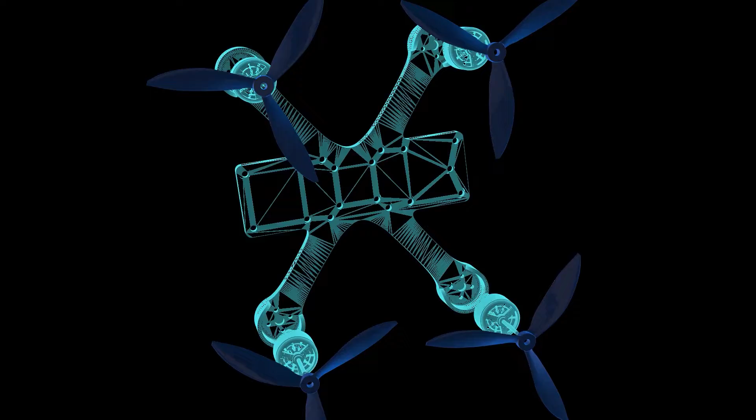In a nutshell, motors rotate your propellers to create movement. They are typically made of aluminum, steel, titanium, or even a combination of these. There are two types of motors used in virtually all drones, brushed and brushless motors. We will cover the intricacies of these in a little bit. However, they each have three main components: the shaft, the rotor, and the stator. Now, on top of the components, each type of motor works on something called electromagnetism. Let's look at that real quick before we jump into the rest.

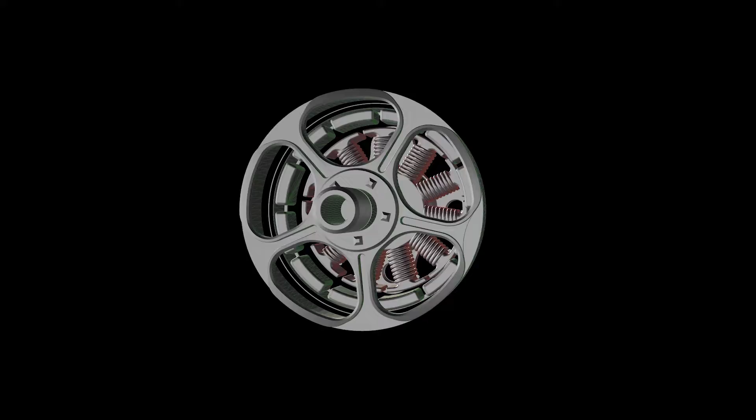Whether you are using brushed or brushless motors, the principle of electromagnetism is at the root of your motor's functionality. An electromagnet in a drone motor is made up of a metal core surrounded by copper windings, which can be activated and deactivated by passing electrical current through it. This then interacts with magnets that are positioned around the metal core. As electricity pulses through the metal core, it turns the magnets, which changes the electrical energy from your battery into kinetic energy in the form of propeller movement.

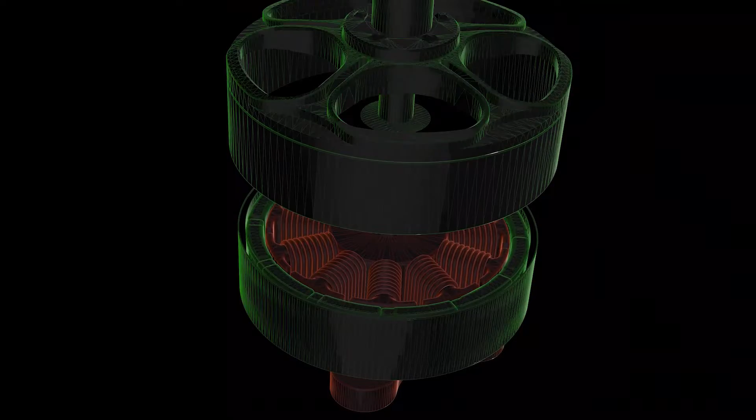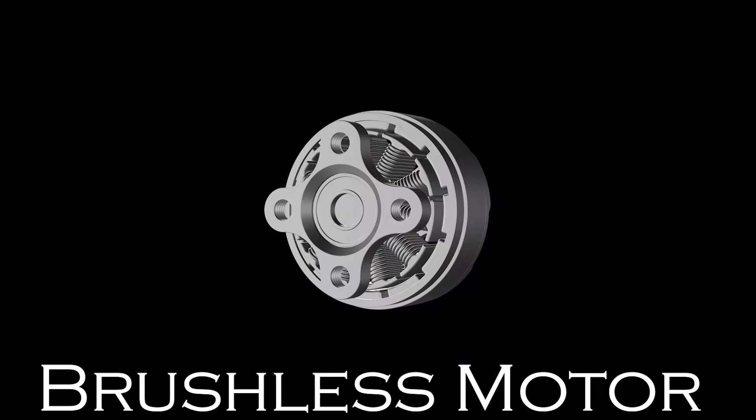Let's break it down into the various parts of the drone motor though. The shaft is at the center of the motor and is what you attach your propellers to. The rotor and stator are then attached to the shaft. The stator surrounds the shaft in coiled copper wire. As we just talked about, these wires are used to send electrical currents that interact with the last part of the motor, the rotor. The rotor is the outside part of the motor and is often referred to as the motor bell or can. On the inside of the rotor though, there are small magnets. These magnets are what interact with the electrical pulses from the stator, and as they do, they begin to spin the rotor and thus the shaft, which spins the prop.

Now, as we said, there are two main types of motors that both use electromagnetism: brushed and brushless motors. Let's look at these. Brushed motors. Brushed motors typically look long and cylindrical and are normally fairly small. Their uses in drones have decreased over the recent years and were much more popular in the past. However, they are still used and for many reasons are well suited for micro drones like the Emax EZ Pilot.

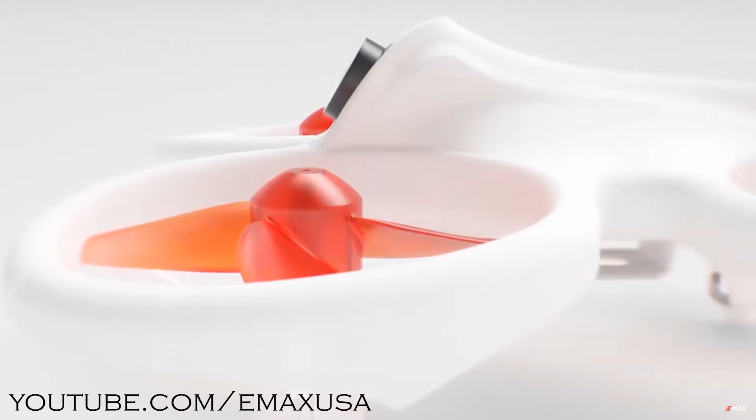Brushed motors are very well contained, meaning that the only moving part of the motor is the shaft exiting the motor can. This works well to prevent damage to sensitive components, but also decreases efficiency since the enclosed motor housing can cause overheating. For brushed motors, the copper coils are in contact with the brushes, which also causes quicker failure. For these reasons, brushed motors are not ideal for anything larger than a very small drone, such as a tiny whoop.

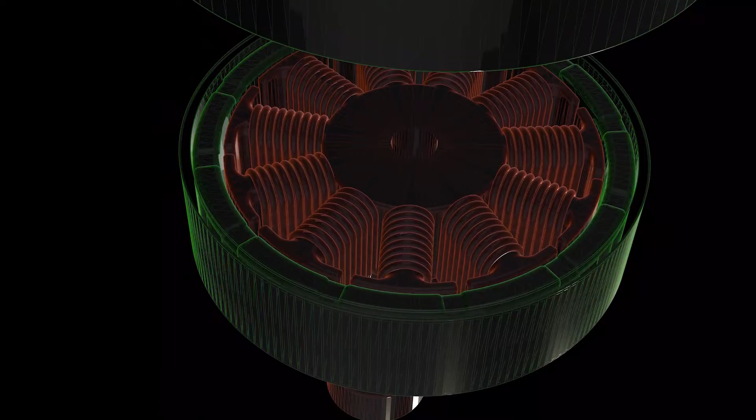Brushless motors. Brushless motors typically have a short and wide cylindrical shape and can vary greatly in size. As their name suggests, brushless motors do not make contact with the magnets on the stator. This prevents the motor from wearing out due to friction between the brushes and the magnets, which increases the life of the motors greatly compared to brushed motors. However, the motor bells on a brushless motor are exposed and can be damaged or dented in a hard crash, which could lead to an entire motor replacement. These motors come in various sizes and can serve various purposes, including tiny whoops such as the Emax Tinyhawk, and larger drones like X-Class racers, which can spin up to 13-inch propellers.

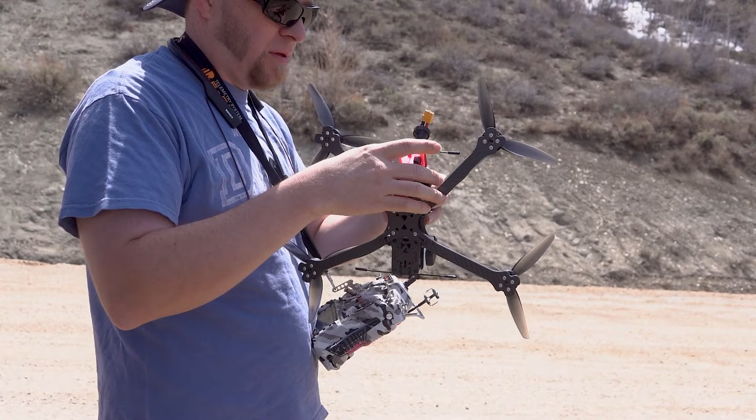Size. Drone motors come in various sizes for different applications. There are a few important numbers to understand when selecting motors. Just like with the props, drone motors have an identifying number system of 4 digits to indicate their size. To use an example, we will look at the Emax Pulsar 2306 motors.

The number 2306 describes the size of the stator, the first two numbers, 23, referencing the diameter in millimeters, and the second two, 06, referencing the height. So for these motors, we have a stator of 23 millimeters in diameter and 6 millimeters tall. The reason this number is important is because different size motors have different performance characteristics.

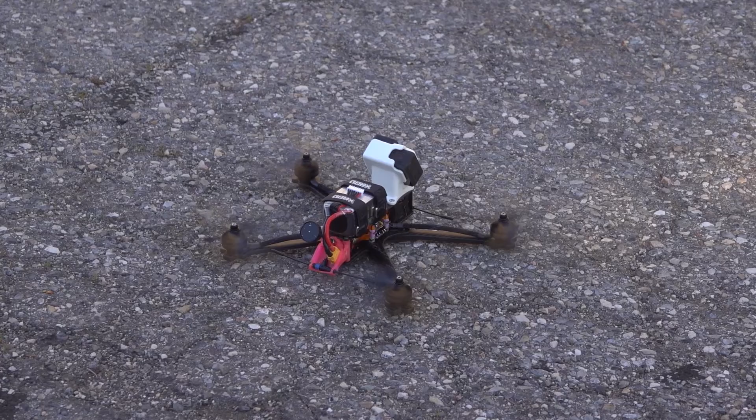For a standard 5-inch build, you will usually see motors with diameters ranging from 22 to 24 millimeters and heights from 5 to 8 millimeters. The most common reason to change your motors is to adjust from a quick and nimble drone to more of an efficient cruiser or vice versa. Typically, motors with smaller stator size, 2206 for example, will be very capable of changing speeds quickly and handling high speeds and high-pitched props. Motors with larger stator sizes, 2408 for example, will require more energy to change their momentum, but will be very efficient once at a cruising speed.

These numbers will also give you a feel for how heavy the motor is. The larger the motor, the heavier it will typically be. This correlates with the rule we discussed earlier. The smaller the motor, the more nimble it will be, but the more power it will draw to keep your quad going. Motor speed. The second number used to identify motors is the kV.

Motor kV is a number which identifies the velocity constant of a motor. It is measured by the number of revolutions per minute, RPM, that a motor turns when 1 volt is applied with no load attached to that motor. It might be tempting to think that the higher the kV, the faster a motor will spin, and while this is accurate in most situations, it is not always true.

For example, if a 2400 kV motor is used on a 4S LiPo battery, which has a nominal voltage of 15.2 volts, the motor will spin at a max RPM of 36,000 without a load. But if we pair a lower kV motor, for example a 1600 kV motor with a 6S LiPo battery, nominal voltage 22.8 volts, the motor will also spin at a max RPM of 36,000 without a load.

Pairing the correct kV with the correct prop to achieve the desired results can be tricky. Matching the correct propeller dimensions to the correct motor is extremely important. Motor kV is the most important factor to take into consideration when determining propeller pitch. For example, you might pair a motor with a higher kV and a lower pitch prop, or a motor with a lower kV with a higher pitch prop to get different flight characteristics.

It is also typical to see smaller drones paired with higher kV motors since it is easier to spin a shorter propeller, and because small props create less thrust, therefore a higher motor kV is important to keep the drone up. Mounting patterns and thread size.

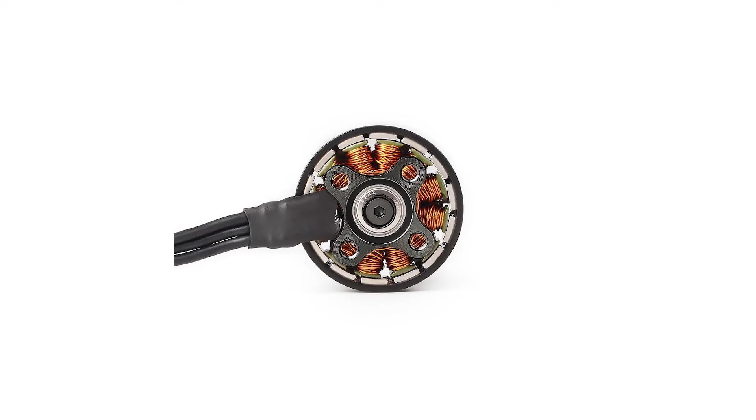Motors will in almost all situations be fastened to the drone frame through 4 screws. The industry has become fairly standard in that frames of a given size, 5-inch for example, will be compatible with corresponding 5-inch motors and their mounting patterns. However, before buying motors or frame, it is valuable to ensure that they are compatible. The dimensions can be found in the specifications for the motor and frame.

An example of a common mounting pattern is 16mm by 19mm, meaning the mounting holes make a small rectangle of sides 16 and 19mm in length. It is also advisable to check the thread size for the screws holding the motor to the frame. Typical for 5-inch drones is an M3 screw.

It is essential that motors are carefully selected with adequate specifications for what you're going to use them for. We will be giving you our best recommendations for motors on the drones we will build in this course, but don't let that stop you from exploring with other motors and configurations to get what will work best for you.